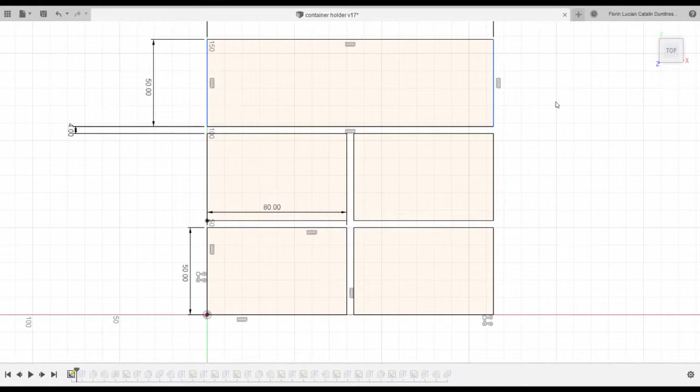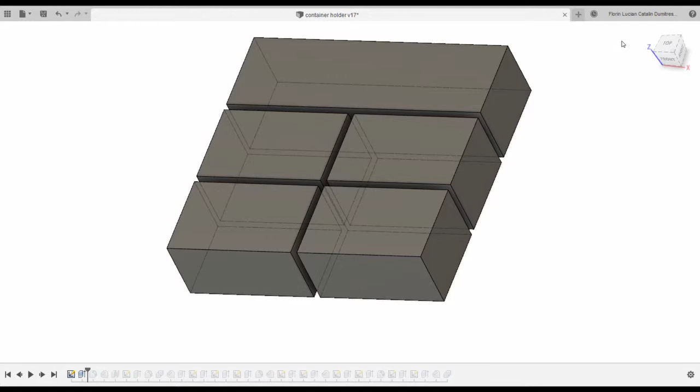I started designing first the small box holder, the bottom part of the small box holder. I drew a sketch which is an outline of the storage box's profiles. I extruded that, and I'll use these shapes when I design the small boxes and the big one.

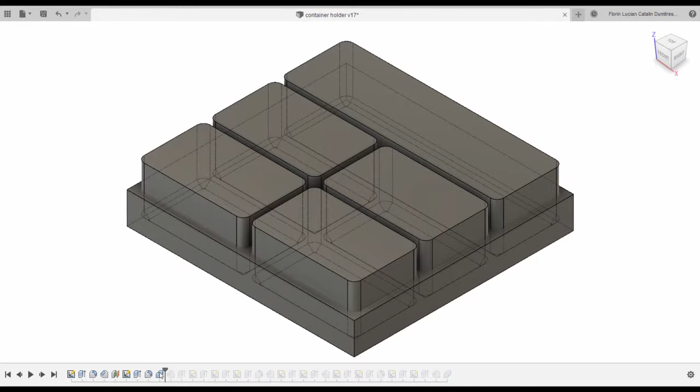I added some fillets and chamfers, and then I designed the overall volume of the bottom storage holder. Then I subtracted the small boxes from the big volume, and I have the profile of the holder. I further refined the design, taking out as much material as I could.

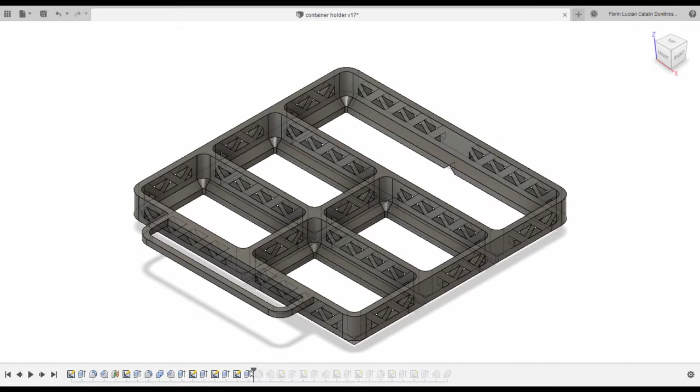I added the handle, and finally I designed the hinge which will link the holder base with its cover.

Next, I designed the container holder cover. It was very easy. I removed further material from the holder base. That's it.

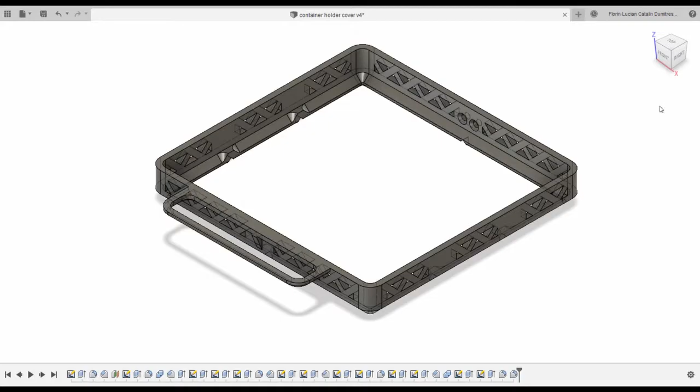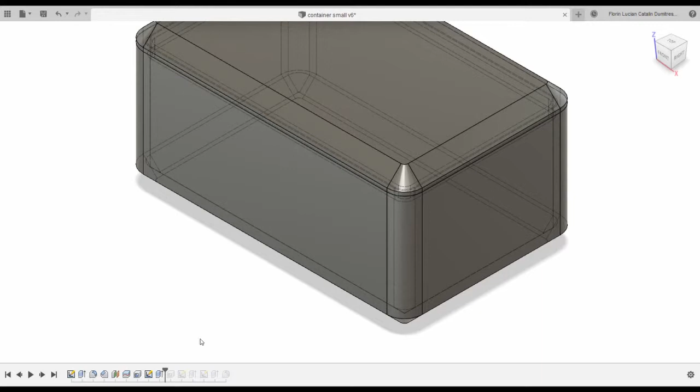Then I modeled the small containers. I began with the sketch. The dimensions are 0.4 millimeters smaller than the holes in the holder. I designed the volume for the whole box. Then I split this volume with the plane for the cover and the box itself. Then I further refined the design.

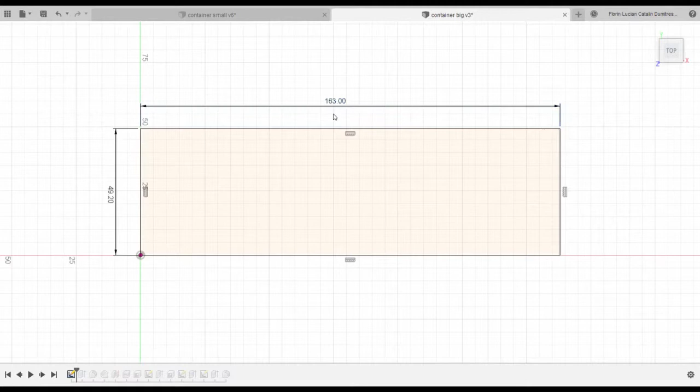This is the big box. The design was very simple. I modified in the previous design only the length in that sketch. And this is the result.

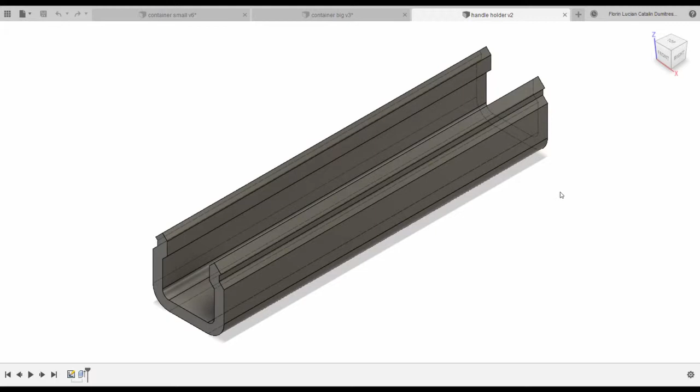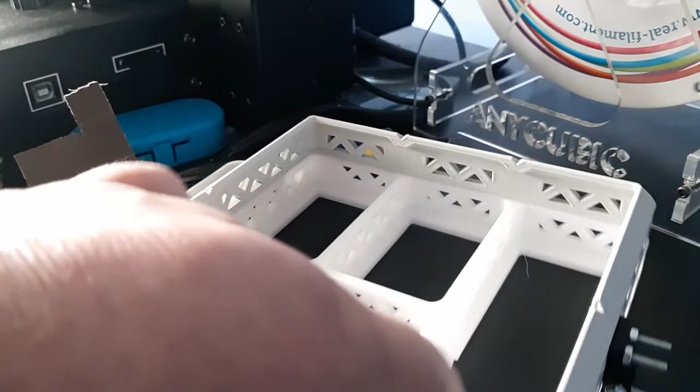And this is the last part for this assembly. It is a handle holder which prevents the cover from opening accidentally. I assembled the hinges with M3 bolts and nuts. Sorry, I didn't have smaller bolts here.

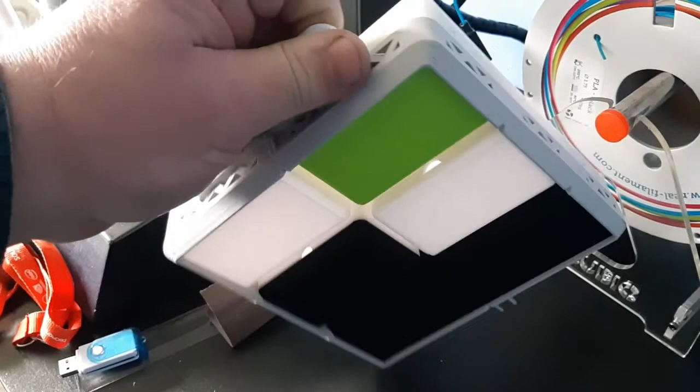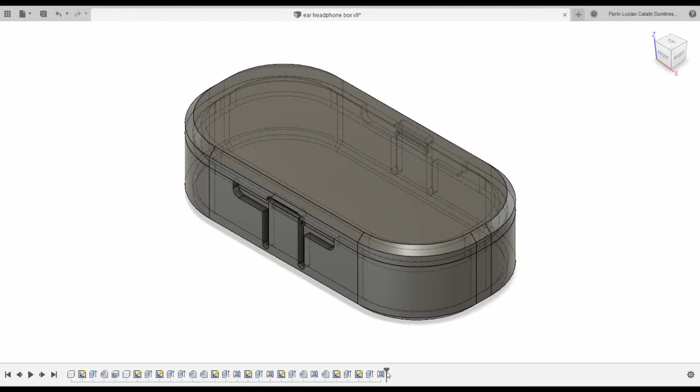The next project is about an object which I use every day. It's a small box for my earphones. Each time I use Fusion 360, I try to learn something new. I designed this earphones box using assembly design. I started with the box itself, with a sketch dimensioned after measuring the headphone wire wrapped up.

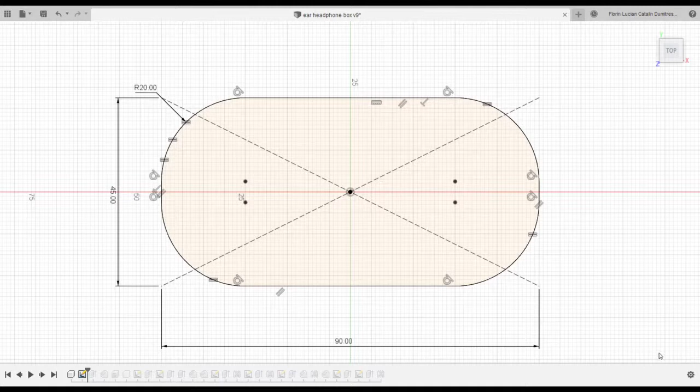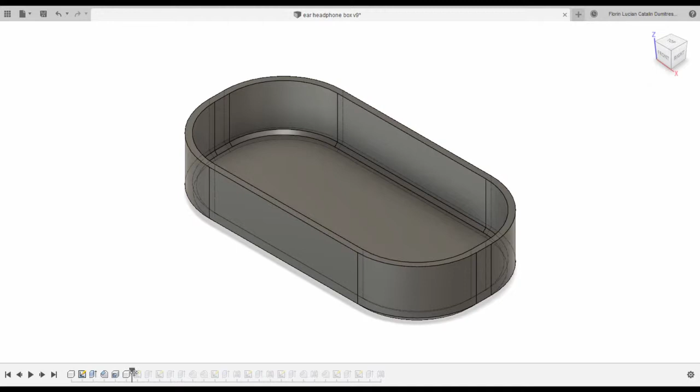Then I extruded the sketch, added a chamfer, making the box hollow. Then I started designing the cover. I added an extrusion for the cover.

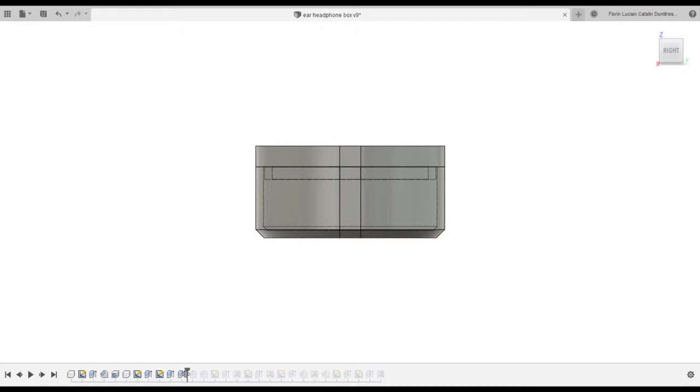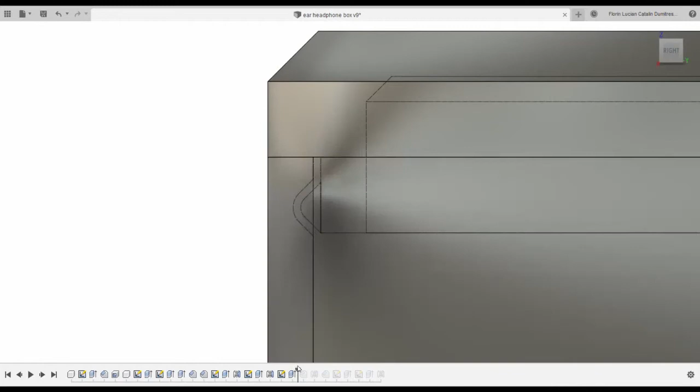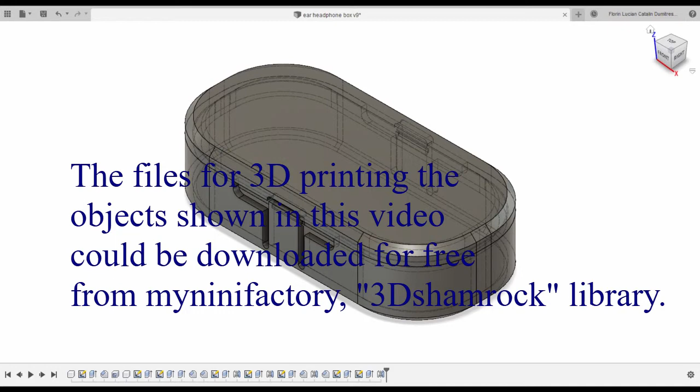I further refined the design, and I added the snap feature which will hold the box and cover together. The snap features in the cover and the box have a 0.3 millimeter gap. And that's it. A simple design. This is the cover and the box.